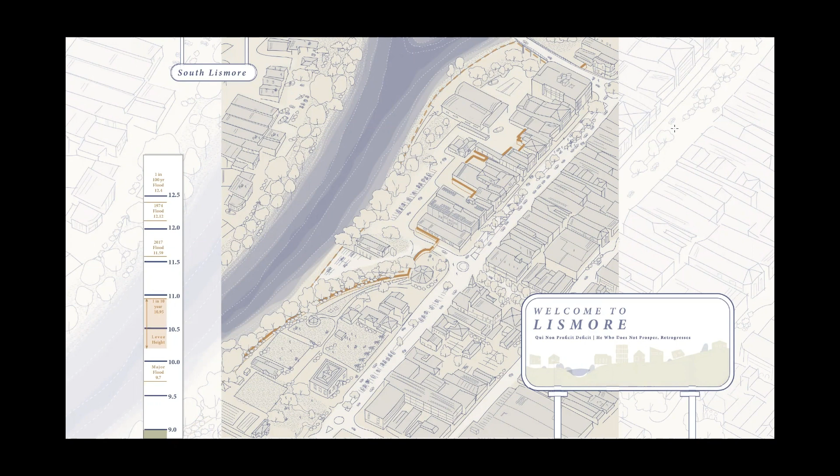Urban planning in Lismore currently turns its back on the river. Physical barriers like the Lismore levee divide the community and river as manifestations of a greater fear of potential waters that can reach up to 14.4 metres.

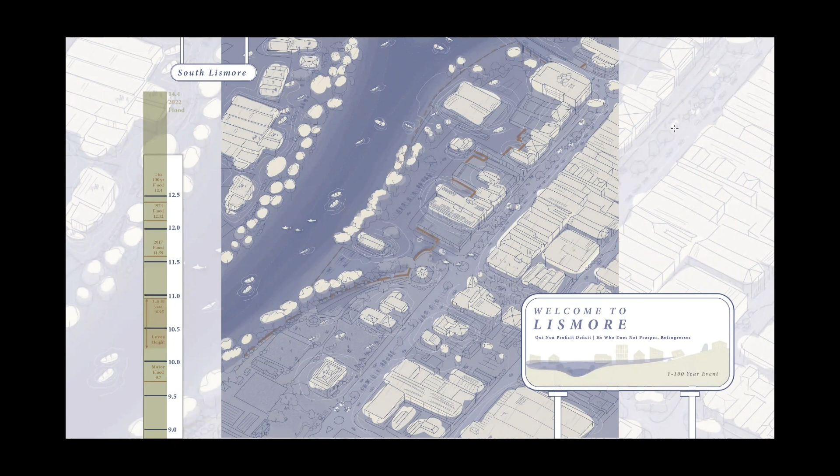Broad stroke solutions by government have created contention within the township, forcefully blocking and relocating the travel of water. There is a need for community-led solutions that embed layers of resilience into architecture, adapting and responding to flood at multiple scales over time. This project thus aims to address these symptoms of division, empowering an already skilled community to take action into their own hands, offering a seat at the table, designing and prototyping solutions at scale.

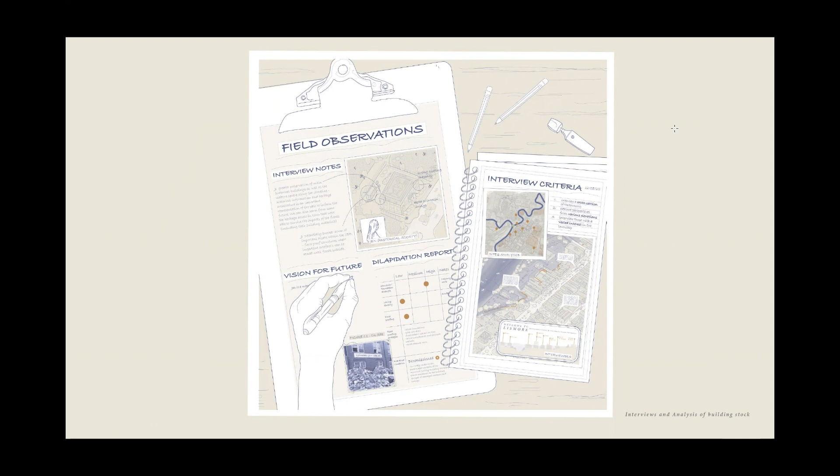A series of interviews, stories, visions for the future, and analysis of existing building stock are gathered, illustrating the failure of existing policy and flood-proof infrastructure in the countless decommissioned structures within Lismore. Existing consultation through message boards and council meetings were found to be disparate, lacking a collective and cohesive method to adapt with flood, and instead perpetuated lackluster reactionary solutions by those who haven't experienced flood firsthand.

In response to these concerns, a group of like-minded Lismore residents joined forces to create an interdisciplinary flood union, a cooperative of community voices interviewed by the designer who act as protagonists for the proposal, championing change and co-designing the future of the riverine township.

The site of the vacant Kirkland Street car park is chosen along the river's edge in an attempt to reactivate and break down barriers to the existing riverfront.

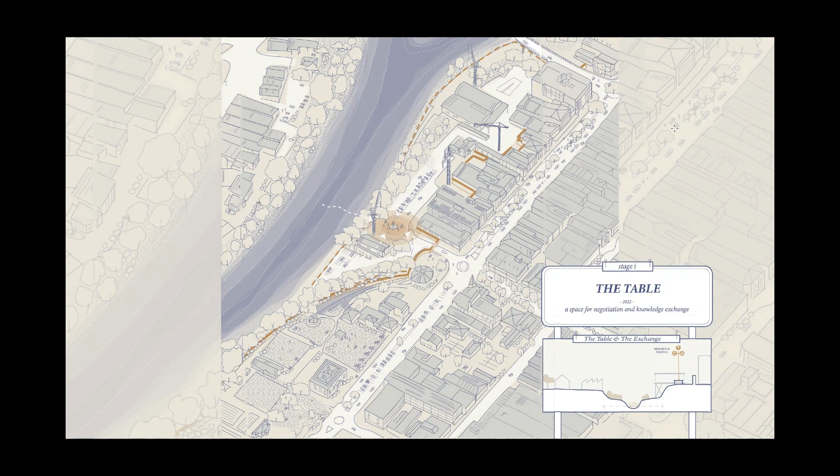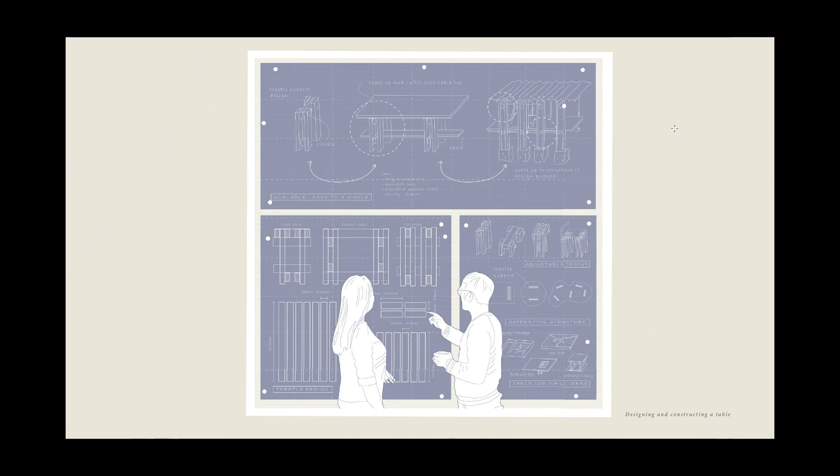The first act of the union entails the design of a table for community discussion and exchange of interdisciplinary solutions, addressing the need for a central point of governance around flood management in the CBD.

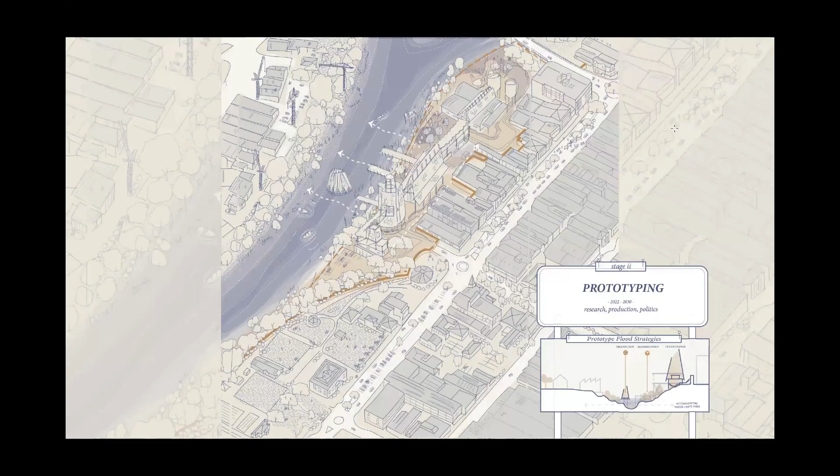Interventions by the union are imagined as a kit of parts expanding from the construction of the table. The site becomes a work-in-progress excavation site for flood-resilient prototyping. The exchange proposal is introduced as a semi-permanent fixture within the town.

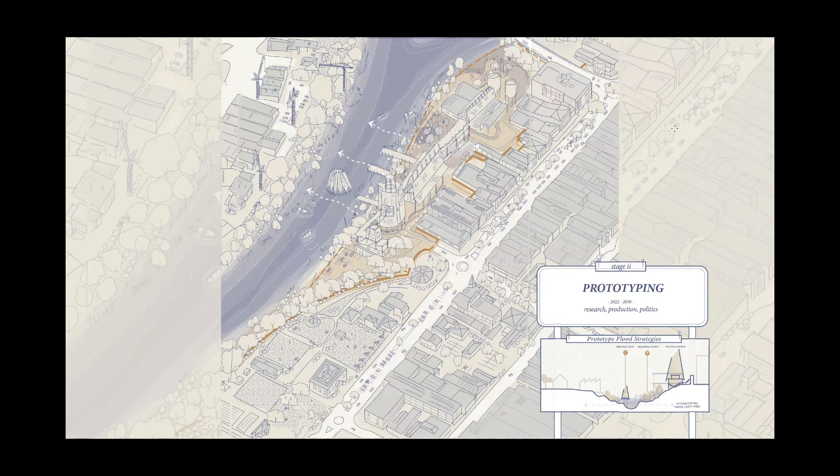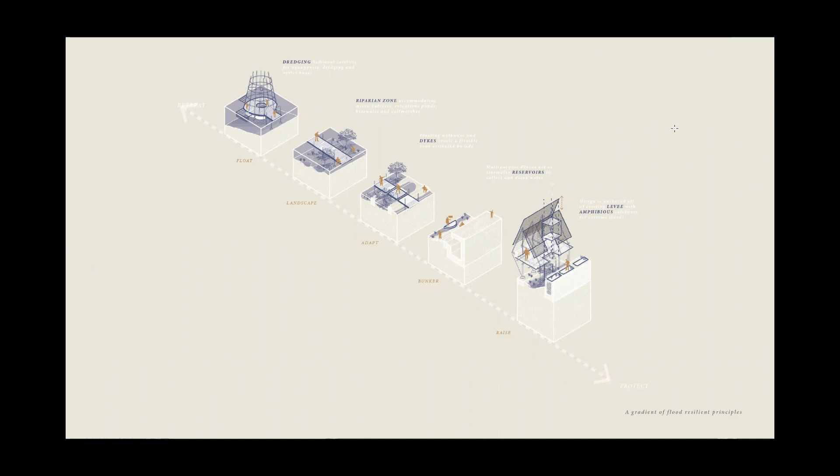By reconstructing the river riparian zone, a gradient of resilient infrastructure and landscape is introduced that captures, dispels, and accommodates water, layering degrees of resilience within the architecture in response to fluctuating flood levels. Community-led reconstruction is encouraged, channeling the existing excavation industry within Lismore. By extracting silt and improving the permeability of soils, river health is not only prioritised,

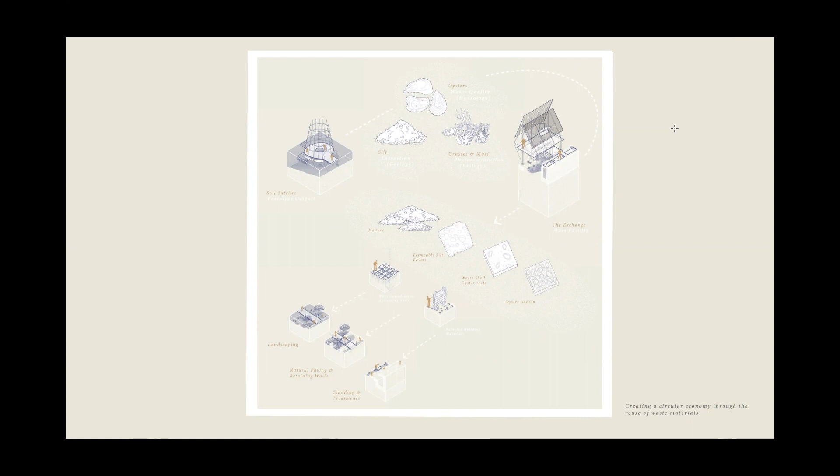but the capacity to absorb floodwaters increase. Prototype satellites deployed along the river collect silt for reuse as permeable tiles, replacing hardscape within the region.

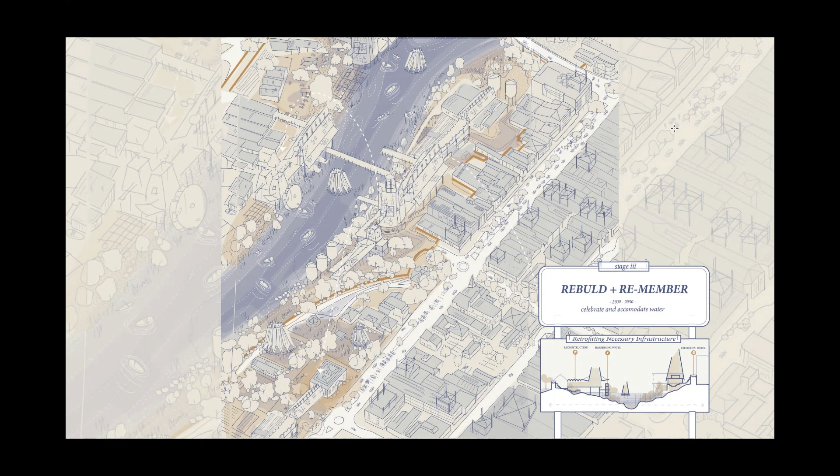In the later stages of the proposal, the knowledge gained from the prototype exchange serves to extend the flood resilient practices past the domestic scale and permeates through to urban and regional scales. A toolbox of flood design principles gathered via rigorous research and prototyping helps to form a guide for living and retrofitting existing infrastructure, admitting no single measure will reduce flood risk.

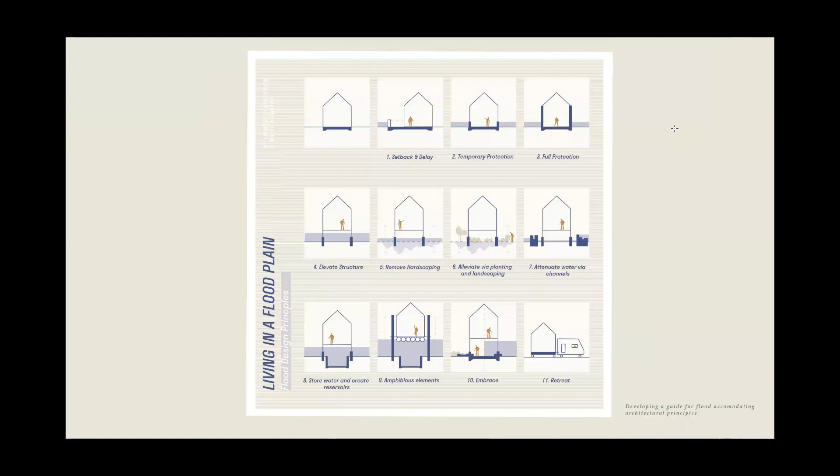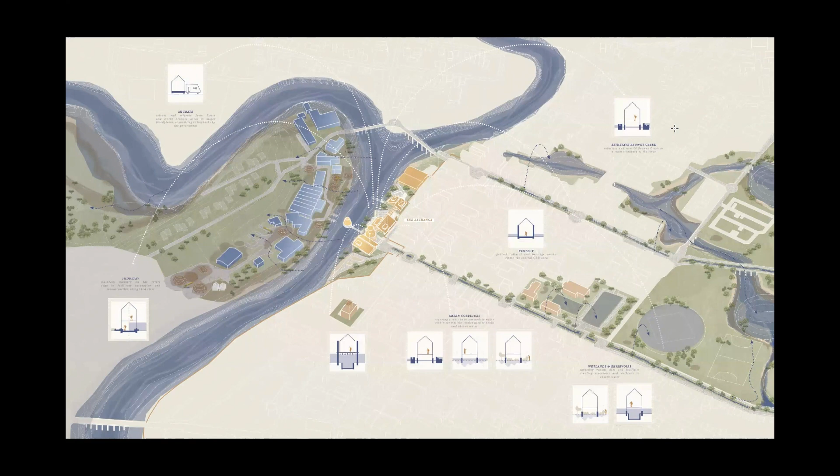The master plan emphasizes the need for a layered approach. Major floodplains at the forefront of the flood are mitigated via buybacks for those who wish to move. The aim is to restore floodplain land to wetlands and reservoirs that store water, whilst also introducing green corridors of vacant land to accommodate and absorb water.

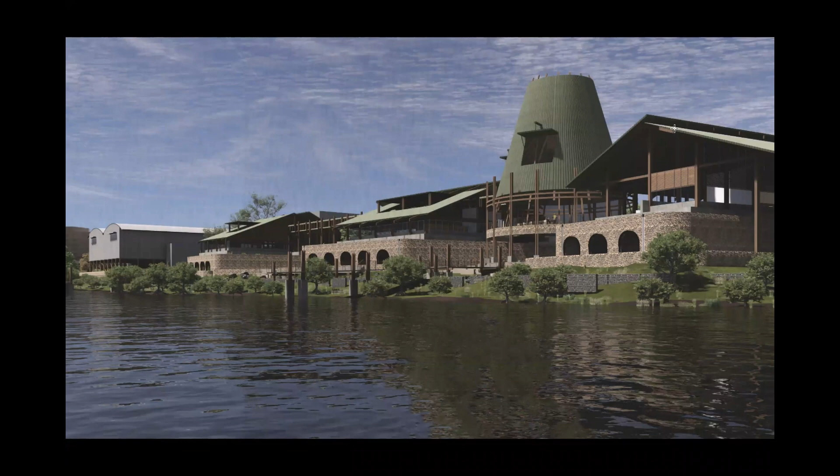The exchange contains the beginnings of these architectural seeds to plant across the master plan. It becomes a beacon connecting and working with the riverfront and community during normal conditions, whilst also switching to disaster relief mode during flood. Amphibious principles are implemented in the design via safe boxes within the building envelope, activated as flood rises to maintain essential circulation paths and storage.

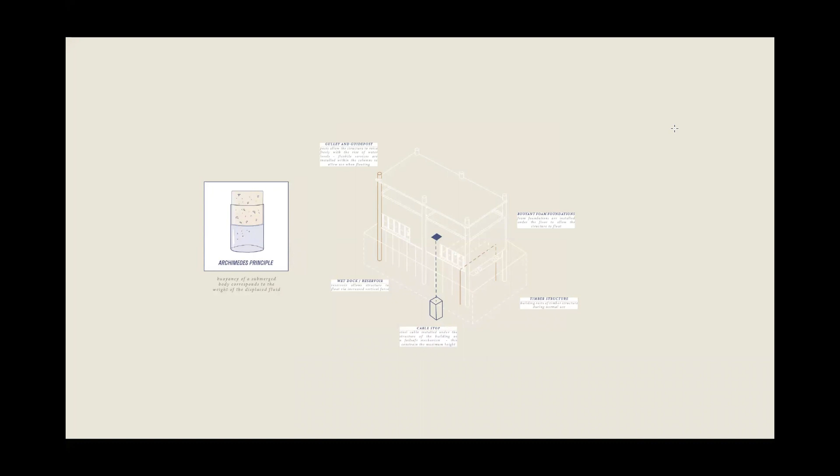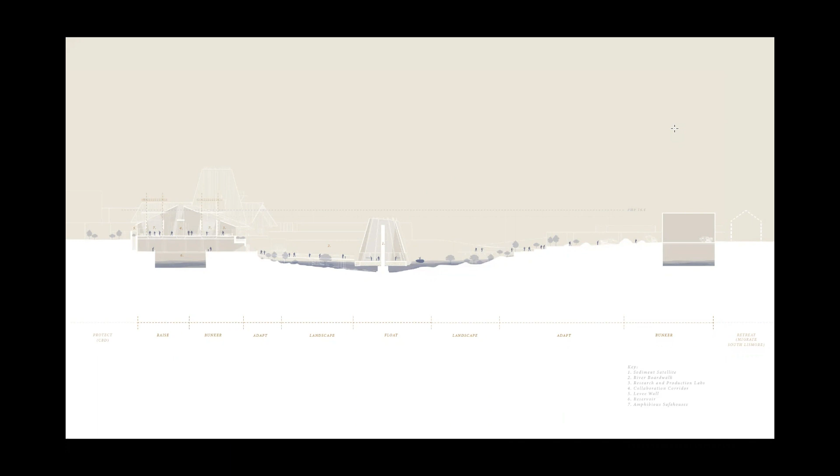This short section illustrates the strategy of the design, a recontoured shoreline implementing the flood principles. Water is accommodated, dispelled, and stored in response to the fluctuation of rainfall and flood. The upper ground contains a central forum and a multi-purpose hall where the union conducts dry research and production.

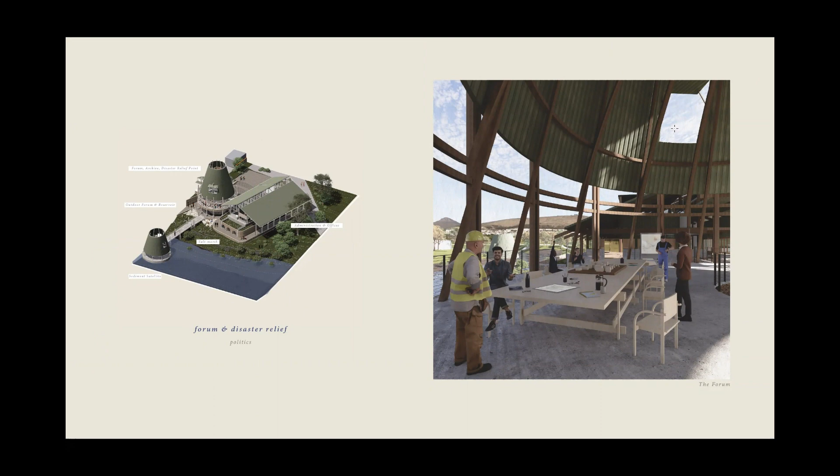The forum houses space for the negotiation of the future township, the union meeting here to instigate change. The interdisciplinary collaboration corridor is a spill-out zone where flood research can cross-pollinate. The labs are working spaces supporting the repair of the river ecosystem, silt extraction, and tile production.

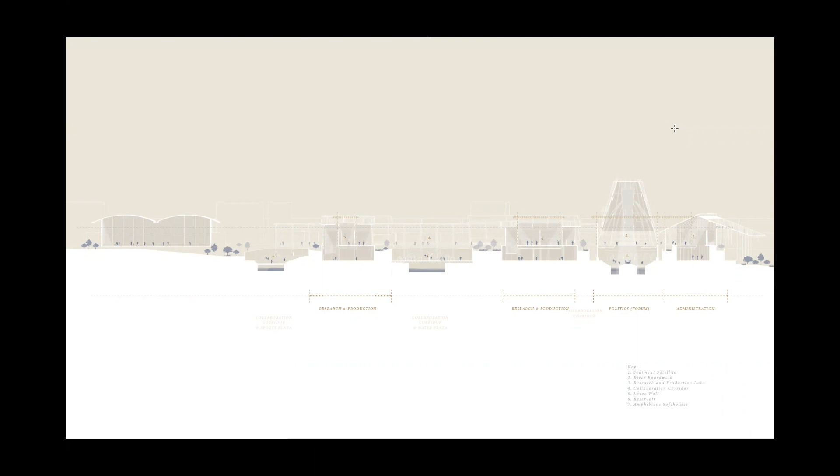These spaces become safe storage when flood warnings are called, all essential equipment being stored here until the flood waters subside. The lower ground plane is carved out into three plazas that reactivate the riverfront, designed as inundation zones where water is accommodated with fluctuating river levels, delaying its entry into the town.

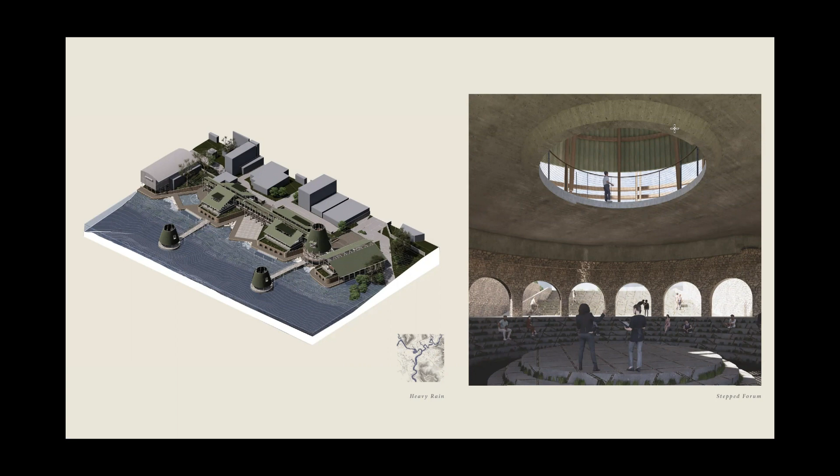A layered and stepped exchange proposal aims to operate at varying levels of flood. In instances of heavy rain, water rise is captured in the inundation zone. During cloudbursts, plazas act as ponds and reservoirs, storing excess water within the scheme.

In 1 in 100 year and 1 in 500 year events, safe boxes in the forum rise to become havens and disaster relief points for the union at the center of the master plan, where boats dock for rescue efforts.

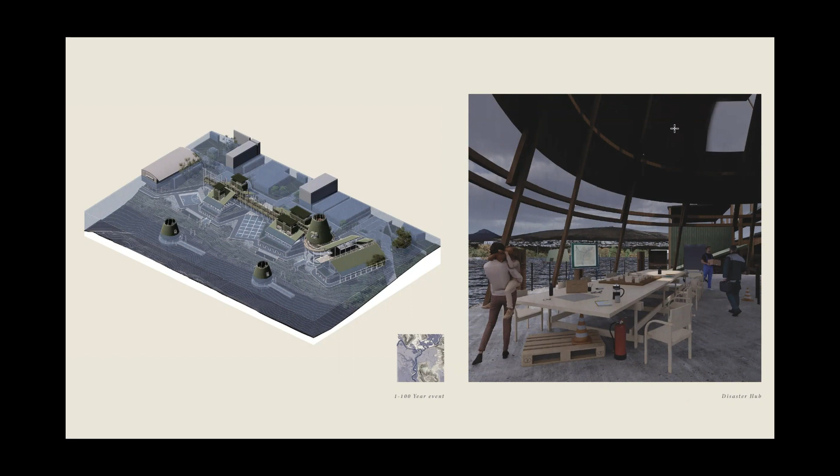Weather patterns and forecasters predict flood disasters are looming and increasing as an indefinite prospect in the future, not just in Lismore, but closer to home in the Hawkesbury.

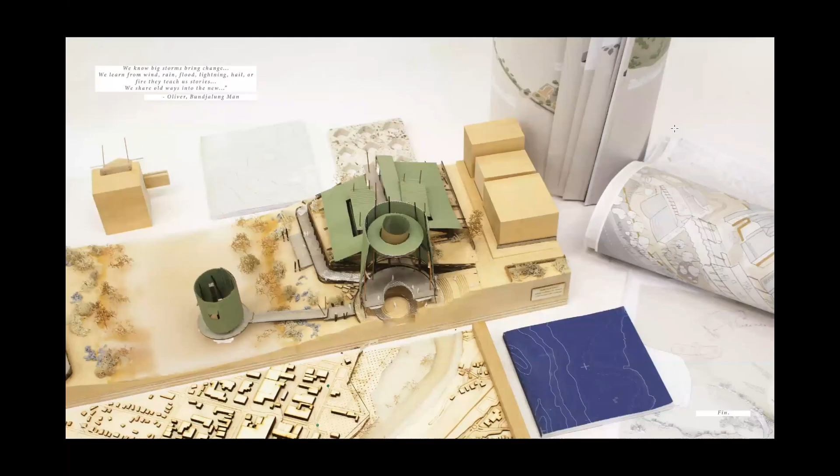The project aims to display a growing desire that exists for a space to negotiate and prototype principles that are not just resilient to flood, but adapt with it, hearing community voices and embedding layers of resilience into architecture.